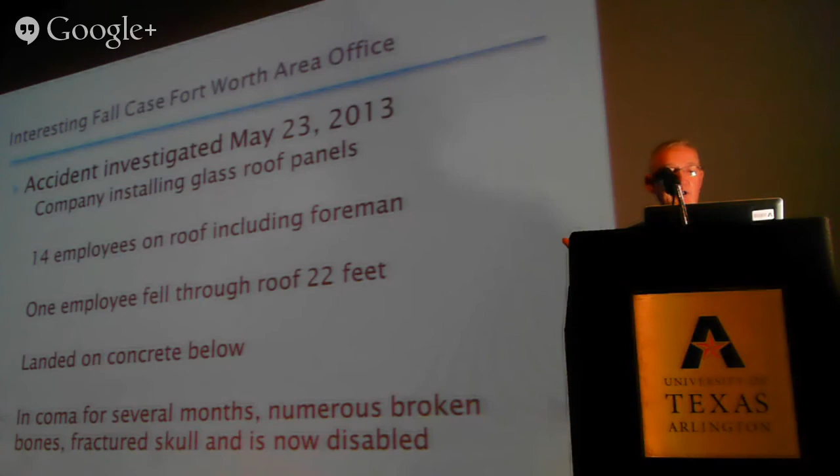There were 14 employees up on the roof, including the foreman. One employee fell 22 feet and landed on the concrete below. He was in a coma for several months, with numerous broken bones and a fractured skull, and is now disabled.

The company had a program in place which was 100% fall protection while they were in the installation area. What had happened was they had plywood over the holes where they were installing the glass.

One employee had walked outside that area, so he unhooked when he walked outside and went to go do whatever he was going to do. After he left that area, nobody else knew how to put the plywood back down to where it was actually secure enough for anybody to walk around out there. So what did they do?

Inspection findings found that after the employee had walked out away from the area, he was called back by the foreman. Since the warning line they had up there was only about 3 feet off the ground, all it was, you just had to step over or step back. There was nothing actually going to stop them from walking in there or notify them that they had to tie back off. So this employee, after he walked out, started walking back in. He just stepped over the area to walk right back in there, and he forgot to tie off.

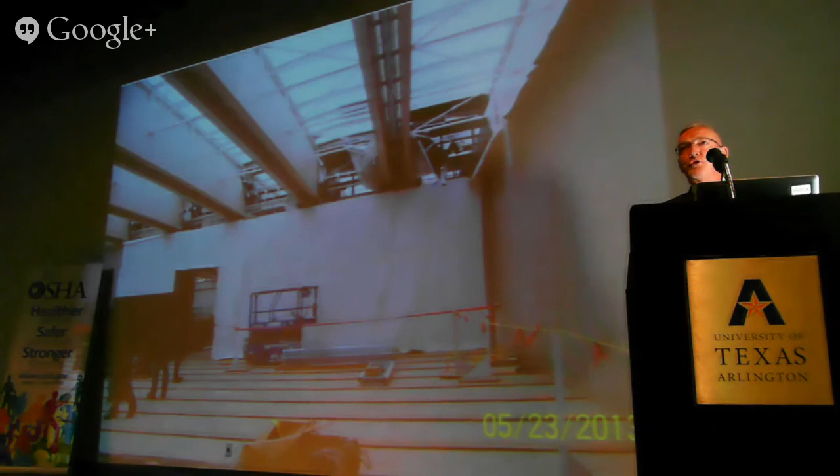You can see right here, this is where the employee fell. He fell through the glass and fell onto the concrete below. Again, luckily, he just had some cuts and bruises, or actually, he went into a coma. He survived the fall, but he's right now in rehabilitation. So what you have right there is the third case scenario, which is the worst of the best.

Our next one we're going to talk about is the ones from El Paso. You can see here that the inspections took place from May 14, 2010 to May 8, 2011, so we had about a 1-year period there. We had 3 of these falls that took place.

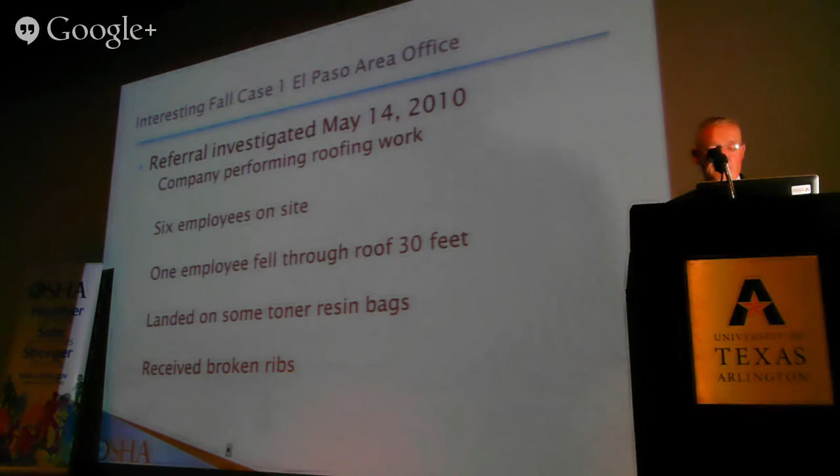The first one was a referral investigated May 14, 2010, where the company was performing roofing work with 6 employees on site. 1 employee fell through the roof 30 feet and landed on some toner resin bags, receiving broken ribs. This right here is probably your second best scenario, which is he just fell and broke some bones, but he's actually able to move around and do whatever he needed to do.

The inspection findings showed the roof deck was rotted through in several places. What had happened was the company didn't inspect the roof for structural integrity, no fall protection was being used, and they did not cover up the skylights. The citations issued in this case were a 501A2, for requisite strength and structural integrity of the roof; 501B4I, for fall protection for holes; and 503A1, for training.

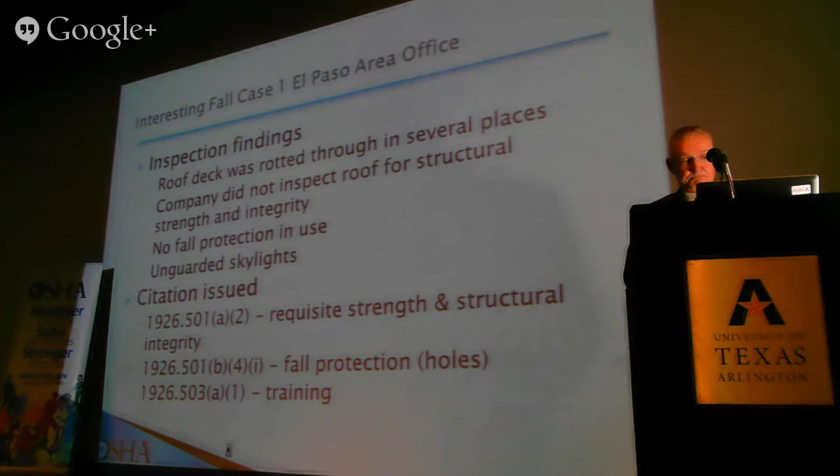You can see here where he actually fell right through the roof, and you can kind of see up here on the top where he had fallen through, and you can see where it was kind of rotted. That's what the hole looked like up on the top. Basically what you had was it was rotting out up there, rusting, and they didn't realize it. They could have walked up underneath this and looked to make sure the roof was actually going to support their weight up there.

Our second case involved a fatality investigation from August 25th, 2010. Company performing roofing work — this is your worst case scenario, by actually times 2 in this case. 2 employees were on site, a father and a stepdaughter, working up on the roof. The stepdaughter fell through a hole 25 to 30 feet and landed on the concrete below.

Needless to say, she did not survive. So in this situation, how is it that you, as her stepfather, now have to go tell that mother that her daughter has passed away on the job site?

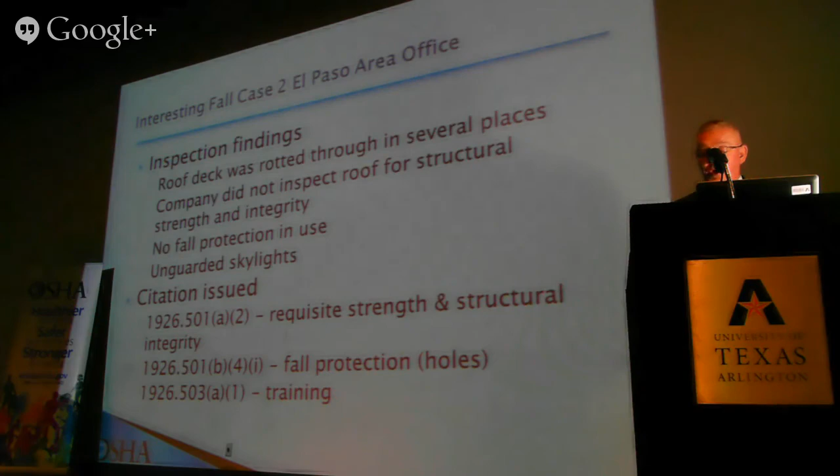Inspection findings: the roof deck was rotted through in several places. The company did not inspect the roof for structural integrity. Fall protection was not in use, and there were unguarded skylights. Citations of 501A2 requisite strength and structural integrity of the roof, fall protection for the holes, and then the training. You can see here where she actually fell through. And that's what the roof looked like on this one.

Our final one is actually a referral investigation. It was May 4th, 2011. A company was performing roofing work and repair on a school. And this is actually your best case scenario right here. The employees were on site. The employee fell through the roof 14 feet onto a table in the teacher's lounge, because they were working at the school, and all he suffered was some minor injuries. But again, we had where they fell through the roof.

Inspection findings were almost exactly the same. Roof deck rotted through in several places. The company did not inspect for structural integrity of the roof. Fall protection was not in use. 501A2, requisite strength and structural integrity of the roof, was issued, 501B10 for fall protection, and 503A1 for the training. And you can kind of see off those last three right there that they were actually all the same.

And so we didn't know if we were actually running into a trend out there, if this was just going to be something that we were going to find a lot more of. So that's why we went ahead and issued the press release to let everybody know, hey, you need to go up underneath there and actually inspect those roofs before you get up there.

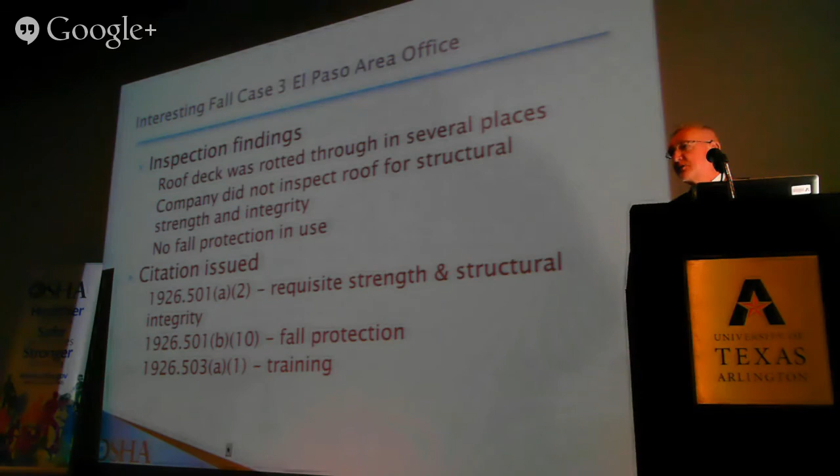You can see here, this is actually the teacher's lounge where he was. There was a table over there in the corner. This is actually taken up through that false ceiling, where you can actually see up into the top. And you can see the rest of the roof here is what it looked like up underneath there. The rest of it's starting to rust out also.

With that, do I have any questions? Anybody? Jack? Yes, sir. Did your people, when you were on top of the roof, was there any visible damage on the top of the roof? Because it looked like the roofs had insulation and things that would obscure you being able to actually see the roof members themselves. And my employees did not actually get up on the roof, because again, we're not going to go up there because we don't know what the condition of the roof is.

The only thing I can show you on these is that from below, any of them had that opportunity to go look. If whoever was inspecting the job site was going out and bidding the job, they could have walked in when they were looking around, and they could have probably actually seen that.

Any other questions? Well, again, I want everybody to make sure, if you're out there working in the construction industry and you're exposed to a fall, you need to make sure you protect yourself. Appreciate it. Thank you.

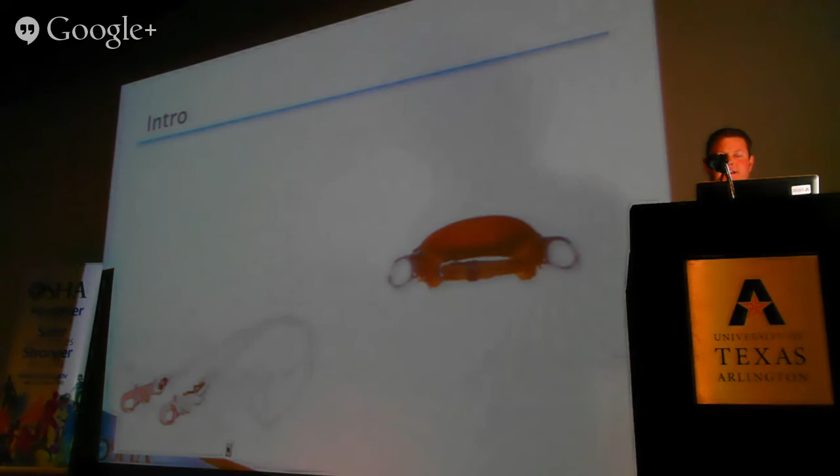So, we're also going to talk about eliminating risk. We have a big campaign right now to try to remove the risk from the employees, and there are several ways you can do that. We've got some slides to talk about it: reducing risk, fall rescue training, fall protection opportunities, and opportunities for improvement and making a difference.

So we have prevention, and with prevention you also have engineering and administrative controls. Prevention is like guardrails, warning lines, controlled access systems. Protection would be PPE controls, things like fall arrest and safety nets. I don't know if anyone has used safety nets yet to arrest falls, but we do use them as a preventative measure for dropping material. I'm not saying they're not used, but that's kind of the last resort, in my opinion.

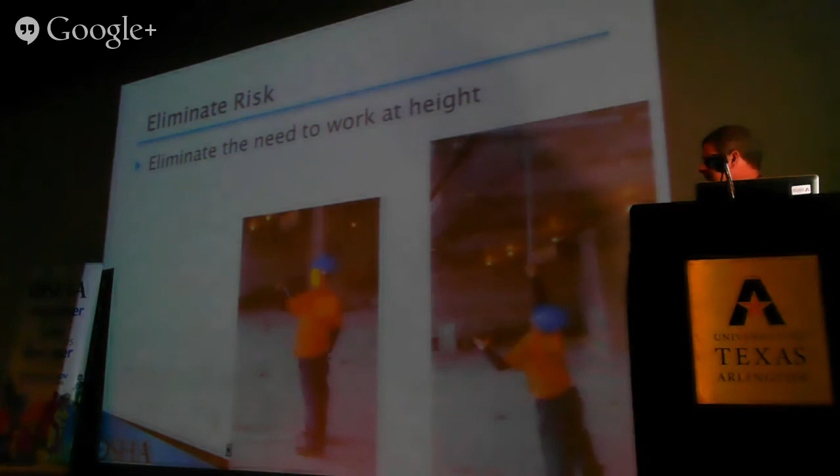So here's something: we've come up with a solution for pinning the ductwork to attach the insulation. The gentleman has come up with a piece of PVC pipe, and he's able to stick his pins on there this way, which eliminates the need for a ladder. Tools that reduce the risk, like a giraffe here. This allows an individual to stand on the working floor and raise the grinder up to the ceiling without ever having to get on a ladder or a scaffold. So we've reduced risk by allowing the guy to stay on the ground and avoid working at height.

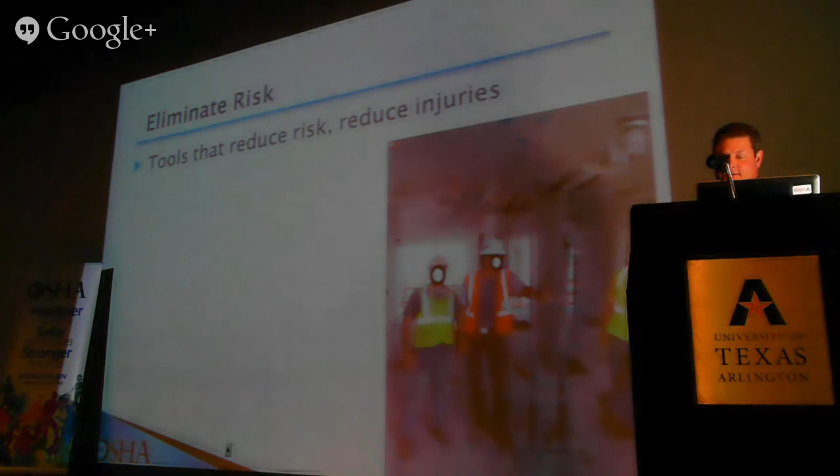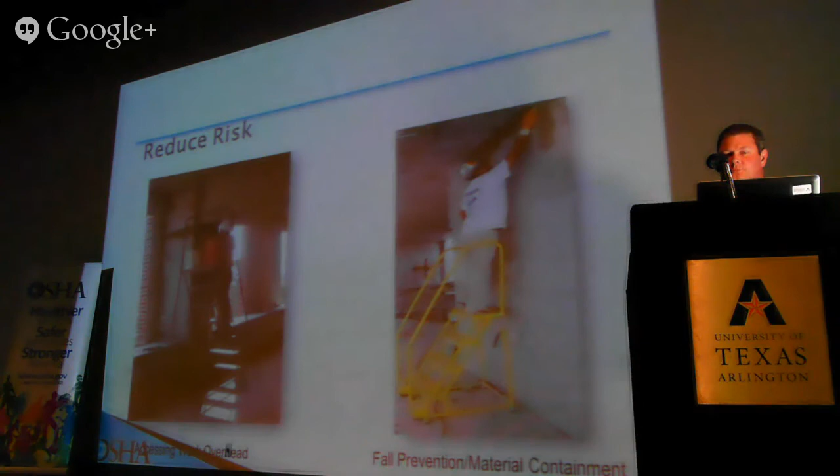Some opportunities here are platform ladders. Platform ladders come with handrails, and they also come with a platform to stand on. It gives a person more security when working. This might be another opportunity to reduce the risk of falls when we're working at height.

When we do have people working at height, if an individual has fallen, we have to save them. A worker that has fallen is probably unconscious or severely injured, not able to help rescue himself. So we've got to respond within minutes. Just a few minutes makes a big difference in saving an individual.

So what we did on the project, and this is kind of unique, we filled a 5-gallon bucket full of concrete, put an eye bolt in it, and attached it to one of the fall protection straps that were cast in place. We threw it off the side inside the elevator shaft, and we had the workers retrieve the bucket. The reason is that you've only got a few minutes to save a person suspended by their fall protection before they suffer injuries like blood pooling and other related things.

There are some opportunities. We built perimeter protection into the soil retention system. This is what Jack was talking about, pre-planning; this speaks specifically to that. It's an opportunity for all of us to look at our projects and think about how we're going to control the hazards on the job site and keep our employees safe.

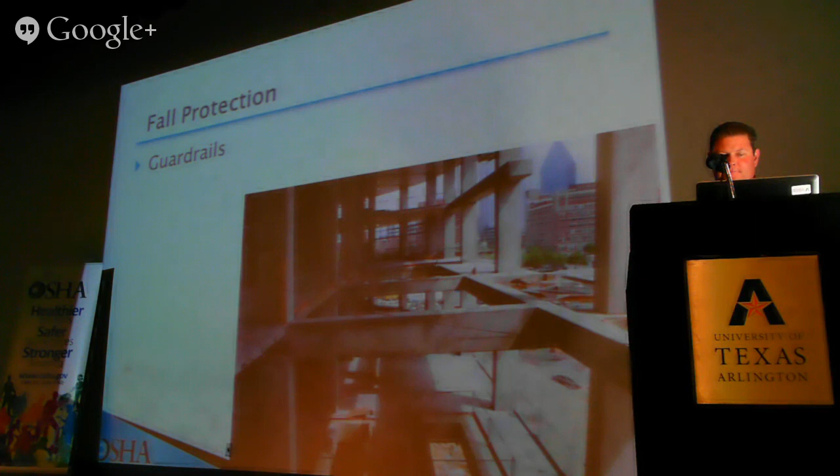All right, this next slide, we've got cantilever debris netting, and the debris netting is very crucial for us when we're building projects. The potential to drop something on somebody around the building is very, very high. So in today's day and age, with the speed at which we have to build, we really have to incorporate a lot of systems into the build of the job.

So in this, we pre-planned cantilever debris netting around the perimeter. You'll see it's missing right here and here. That's due to the landing platform for material storage or the material for the forming operation leaving, and then you'll see it stops here because we're about to raise the elevator up a little bit. So it has some limitations.

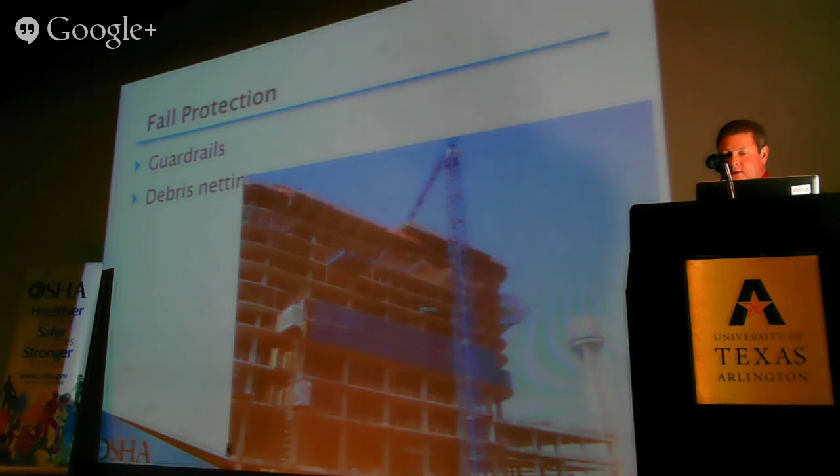To help with that, we also asked our forming contractor on the guardrail system that's on the formwork to put debris netting up and around there. This is for falling material for sure, but it also gives you another sense of security when you're up on those elevated decks looking 200, 300 feet down, and what safety measures are in place. It makes you feel a lot better.

Now, there are some opportunities where we still use the wood guardrail systems, and sometimes you have to use signage to let people know what the actual hazard is. So right here you see the confined space. It's a great place to stick your signage, but also if you build the guardrails, I want to emphasize how we build them. It needs to look professional. If it looks professional, it will have the effect that we want. I've seen guardrails built before that look like if you leaned on them, they'd fall down. That's not the intent. It is to save people, keep people inside the building footprint, and eliminate the fall hazard.

Here we have the metal guardrail panels, and this is probably one of the scariest places for me on the job site. The reason I say that is because in the elevator shaft area, we have a lot of work. What we still have going on up top is the construction of the building. So we have formwork up top, and then we have these open shafts from every floor, all the way from the basement to the forming area. And because the speed of the build is much faster than it used to be, we have to have people in the elevator shafts working at times.

So what we have done, as you can see in the photo, is we have cantilevered out platforms in there that provide a level of protection for material drop. We've also sectioned off the primary area for entry by wood guardrails, and also with the metal panels here. That's given us several levels of protection. Inevitably, you find people that want to get into the elevator shaft area. For me, that's scary, because if a guy drops, he could drop 300, 400 feet pretty easily. 6 feet, 7 feet, 10 feet would be too much for me.

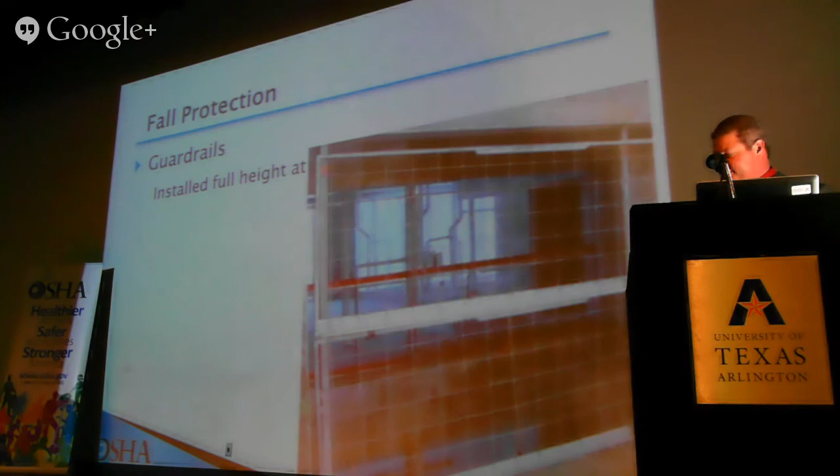You'll see that on our hoists, we fully wall the area around the hoist, and we limit the amount of space between the door and the car. The reason is that somebody could potentially get in between the car door and the door leading into the building, and we wouldn't want someone just standing in there, because if you allow enough space, somebody could potentially stand there when the car is passing. So we've eliminated that.

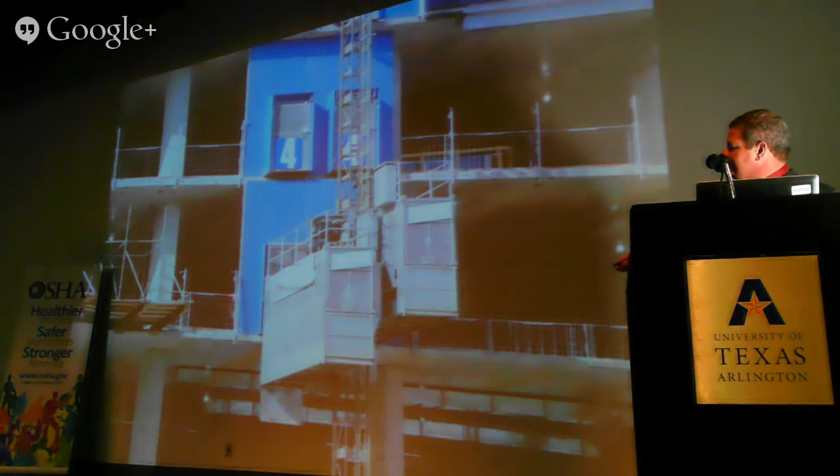Another thing is you'll see the metal guardrail panels sitting up to the sides, and then we've got a landing platform right here, and we use those panels to provide protection for that as well.

When we were talking earlier about pre-planning, this is an understatement. Planning for safety in construction, because we build so fast these days, is so crucial that if you don't plan for it until it's time to do that activity or perform that scope, you're going to be behind. So what you've got to do up front, before you ever get started, is look at all the hazards that exist within the building and come up with a plan.

These guardrail systems that are on this building right now probably took a carpenter crew at least a week to build, just in this one area. So looking at the time and trying to get people up to the elevated area safely, you've got to plan that stuff into your day.

Now I want to share a story. This is just a hole cover, and we talked about hole covers earlier. In 2006, I was on a job, and we had a guy who was new to construction. He was about 9 days in the United States, and probably 6 or 7 days on the job. I didn't even know the guy existed. At that point in time, we didn't have a new worker or at-risk worker program.

So what happened with this individual was we had some hole covers on the second floor of this building. Fortunately for him, underneath that building on the first floor, the owners didn't know what they wanted to put in this retail area, so all you had underneath it was compacted dirt, with a grade beam running around the perimeter. His foreman told him to pick up all the plywood on the project. This guy is making, I don't know how much an hour, but he feels like he's making good money for his family, and he doesn't want to let anybody down. So he goes to pick up the plywood, and he gets to this other piece that has 'hole' written on top of it. It's cleated so it doesn't get misplaced or displaced, and he picks it up, walks forward, and falls 19.5 feet down to the dirt below.

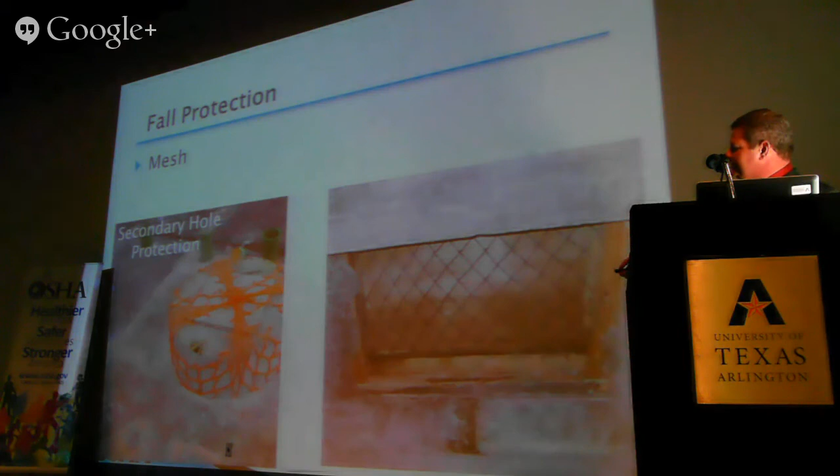This is another system that looks similar, but this object right here, we're going to see this appear right here. This is what it looked like whenever they placed the sleeve, they placed the concrete, and then they ripped out the sleeve. They had this mesh inside the hole to prevent somebody from falling. That's another opportunity. I still like the hole cover on top of it, but that's good planning.

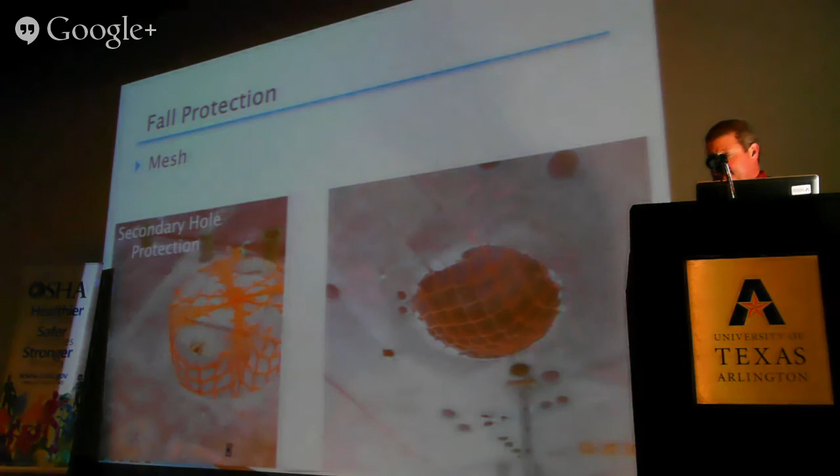And again, if you don't plan, you're going to fall behind quickly in this business because of the speed at which we have to build.

Vertical netting is something that we've used several times and we're going to continue to use because it provides so many benefits, like catching falling debris. We can do our work inside the building whenever we've got the mesh up. You can see we can use it on multiple floors, and we can continue to do our business inside the building and provide protection for employees from falling out and also debris falling out and hitting somebody below.

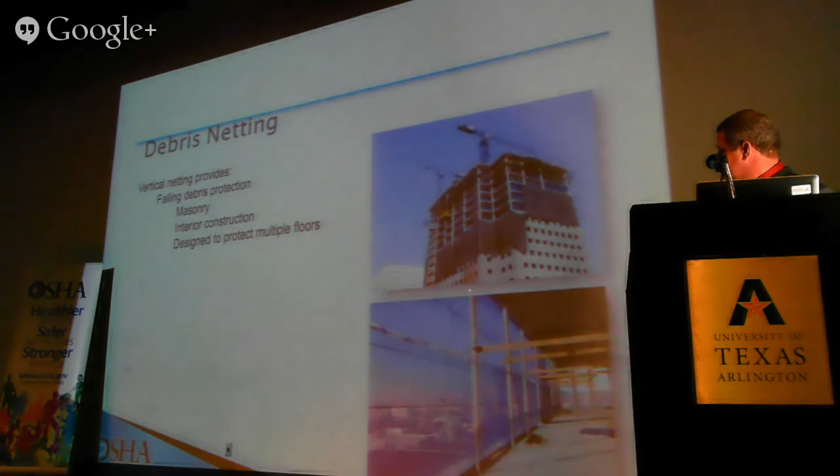See the shoring? This is something that's not an employee from falling, but it's definitely an object falling. What I'm looking at here is the shoring. It's been tied back to eliminate the event that if it comes undone from the structure, it wouldn't fall outside the building and hit someone.

Here's an opportunity where we've got the mesh in place, but we've also got a cast-in-place strap to tie off to. That again is a lot of pre-planning and a lot of opportunities for somebody to work safely up there, because typically when a guy goes up, he doesn't have a hammer drill to drill a hole and something else to put an anchor in, and he has to do that every place he has to work. So try and step out there and get in front and try to eliminate the barriers from working safe.

This is also another opportunity to get mesh underneath the formwork. I call this stick framing. What happens is you've got to put your aluminum beams out, and then you've got gaps in the formwork where a guy could potentially fall, or a piece of equipment or some material could fall. So they put nets underneath it. That's forward thinking, knowing that gravity exists and affects everything we touch, including us. We have to eliminate the potential for something falling.

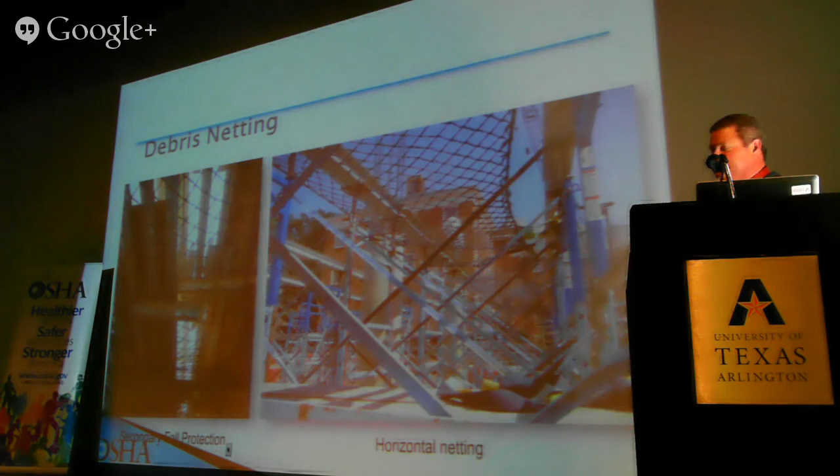Fall protection is as simple as ABC. A is an anchorage point, rated at 5,000 pounds. B is a body harness. What I said earlier is I wore a body belt when I started in the business. Now you have a full body harness. It almost looks like something you'd use if you were parachuting.

Here's something I want to challenge all of us on, and I keep hearing this from some people: they don't know how they're going to tie off at the base, at the ceiling, when their lanyard's 6 feet long and they're 5 feet or so to their D-ring, on a 13-foot floor, working on their ladder and tied off. They ask, how am I going to not hit the floor? Well, my response is, why don't we start trying to use self-retracting lifelines that stop our fall descent in 2 feet?

Here's a system that's out there on the market today, an opportunity to tie people off to. You see they've set it up in place. They've got this arm cantilevered out, and they've got their self-retracting lifelines tied to it. You can grab the hook, put it to your D-ring, step across into the fall zone, and you're protected.

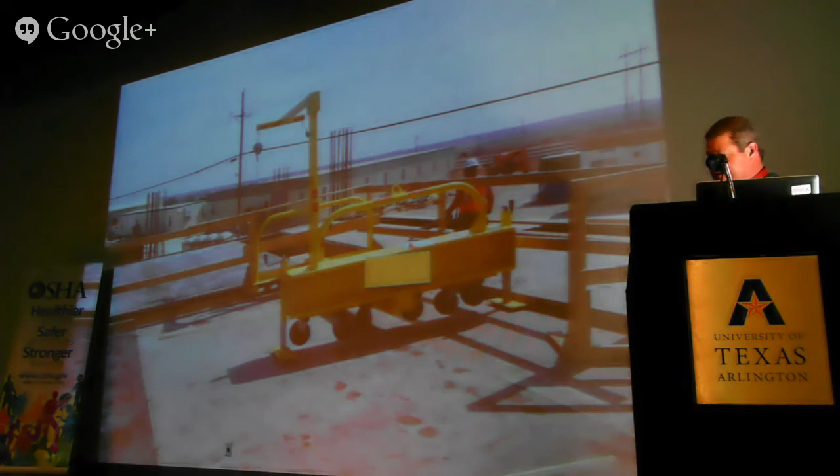Here's another system where they've taken a horizontal lifeline and wrapped it around the rebar coming out from the termination of the column, and tied it off to the other end, another column.

Vertical lifelines used to access work platforms is a very good way. There's a lot of good planning involved. They've got to climb that. In the event that they fall off the scaffolding, they could potentially save themselves just by being tied off to the rig.

Cast-in-place concrete straps, we're using those a lot these days, and potentially more so here in the future. Here again is somebody looking out in front. They've got their system placed into the columns, and then fastened on the end. They've got horizontal systems where they can build their formwork. They've got a lot of good fall protection practices out there that I've seen, and your contractor's pretty smart when you challenge them with a problem. Sometimes they come up with a really good solution, and a lot of these forming contractors have good plans.

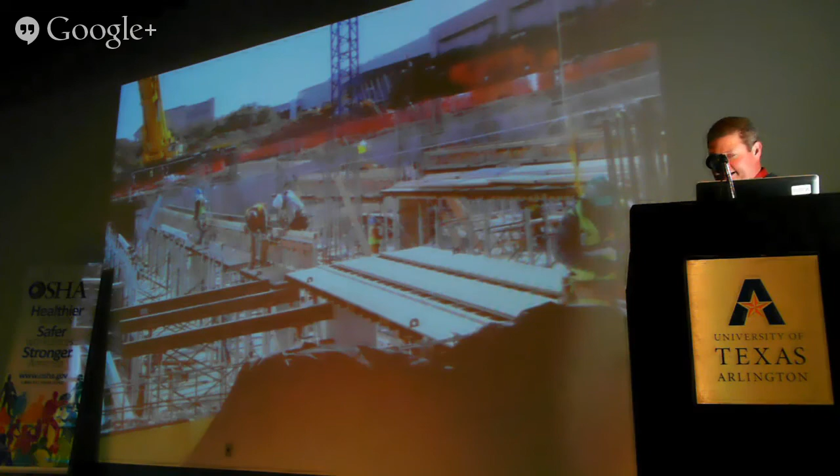The opportunities within the business—let's pan to this picture right here, and I want you to look at it. These guys have an engineered system. The concrete straps have been put in place. They're tied off, and they believe they're doing the right thing.

The problem with this is that the system's not made to have a knot in the rope, and it's not made to have sag like that. We have a contractor that bought them the equipment, but we really didn't teach them the right way to use it. That's what I see a lot, and the opportunity for us is to see those individuals and call that out. We have to facilitate change, and in that we have to be proactive in engaging in conversation. Sometimes it's uncomfortable, but we have to push people into considering what we're doing today may not necessarily be as good as what it once was when we started doing it.

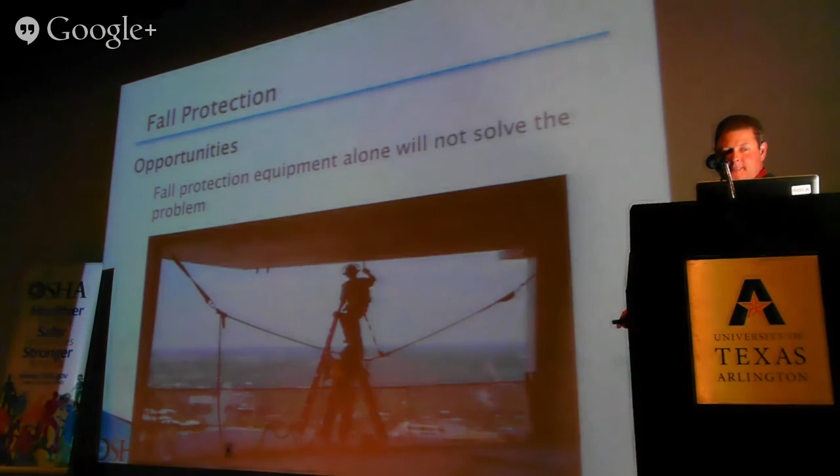As an industry, we must identify our hazards associated with our scope, and that means each contractor has a specific scope of work they have to do. Now in that, I think we all have to identify our hazards. We have to understand what we're putting our folks up into, understand the level of risk, because everything has risk—there are varying levels. Train our workforce accordingly.

And this one right here is something I'm not seeing a lot. There's a lot of good contractors that do train their people, and they do train to fluency, but there's some that don't. They just give them a one-time training, give them the equipment, and then expect them to do the right thing. That's a fallacy, and we've got to correct that if we're ever going to get past some of these things.

The next thing, and this is the one thing that's typically skipped, is verifying that training is effective. Again, we train them once, we give them the equipment, and then we turn them loose and we don't go check them.

We need to inspect what we expect. And that's huge for all of us. If you're managing people out in the workforce, if you don't tell people what you want them to do, show people what you want them to do, check up on them making sure that they're doing what you want, then at the end of the day you have no right to expect that they did what you wanted. If you've been in business or been a manager long enough, you'll know that to be true, because if you don't do those steps, every time you'll come at the end of the day and you won't get what you thought you had or wanted.

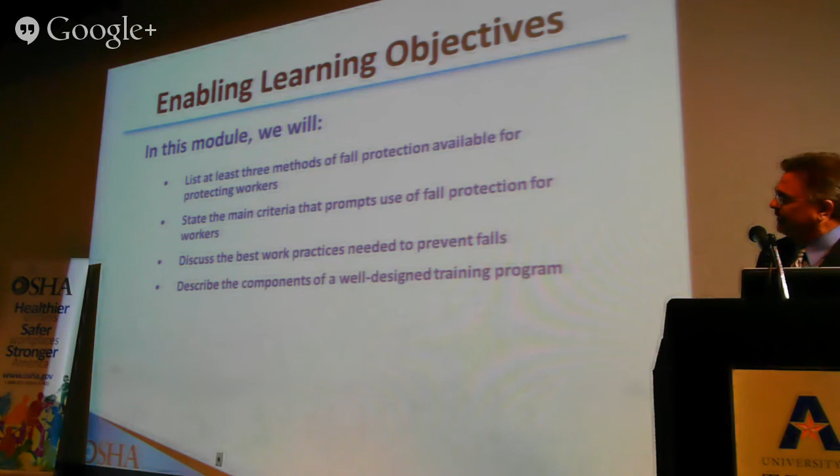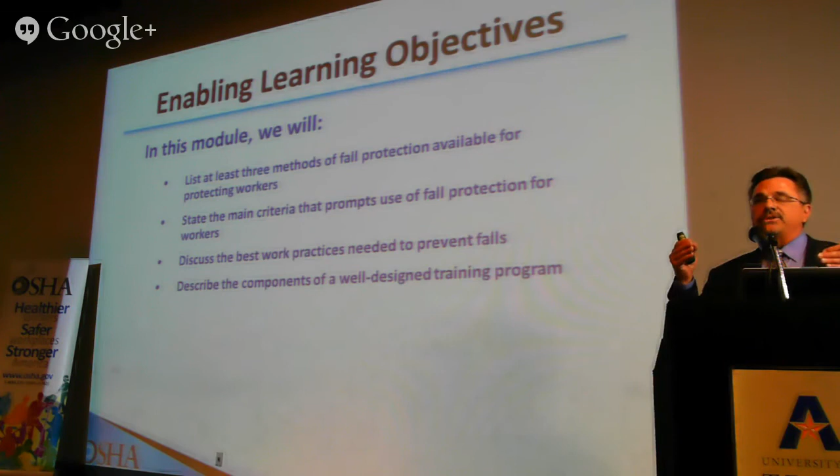So let's take a look. We will list at least 3 methods of fall protection available for protecting workers. We will state the main criteria that prompts use of fall protection for workers. We will discuss the best work practices needed to prevent falls, and we will describe the components of a well-designed training program. So 4 main enabling learning objectives that will get us ultimately to that terminal learning objective, that ultimate goal. All right, then what do we do?

We start to actually kind of flesh out those ELOs.

We start with just some basic facts to kind of get the ball rolling and get everybody's mind going in the same direction. So let's take a look at it. Falls are the leading causes of death in the construction industry. And what are we doing here today? And what are we doing here all week across this country during this stand down?

Ultimately, we're trying to save lives. We're holding training sessions, we've got lots of handouts and brochures and posters up, and everybody is talking about it, but what is the ultimate reason why we're even here? It's that first one. We're here to save lives, and if we can just save one life, it's been worth all of the effort, all today, all this week, all for the rest of our time to save that one life. That's the real reason why we're doing this.

Most fatalities occur when employees fall from open-sided floors and through floor openings. Falls from as little as 4 to 6 feet can cause serious lost time accidents and sometimes, yeah, even death. Open-sided floors and platforms of 6 feet or more in height must be guarded.

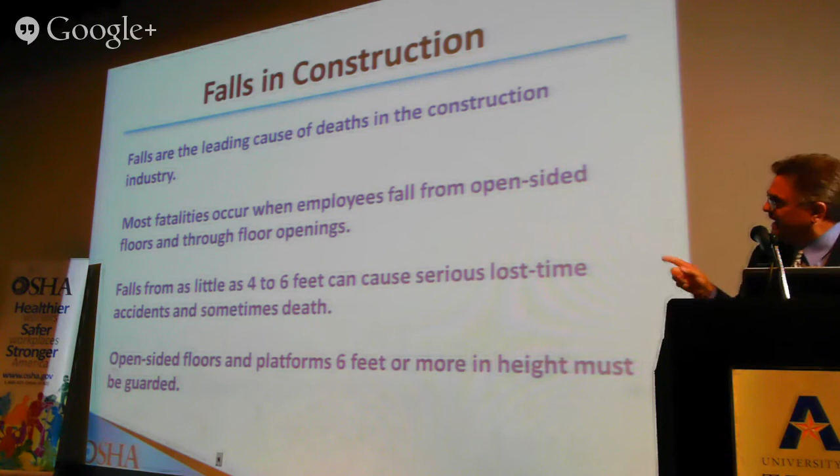Did anybody kind of do the math in their head that if he fell, he'd still hit the ground? And look at that bullet there. Falls from as little as 4 to 6 feet. Well, he was about 6 or 7 feet up a 10-foot step ladder. So he, wearing all this fall protection, thinking he was protected, could still have hit the ground. So even the small falls, the short falls, still can hurt. Off of this platform that I'm standing on, maybe off of something even shorter than that.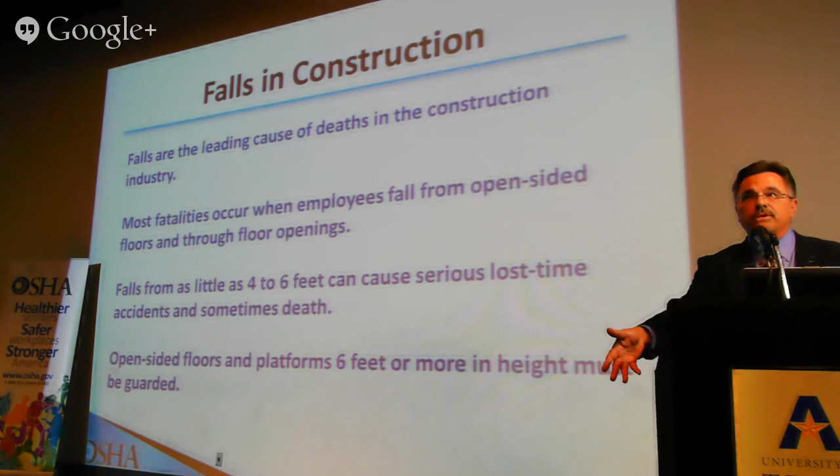Okay, let's take a look at our fall protection options. We have personal fall arrest system, guardrails, safety nets. These aren't the only options, but we call these the big three. One of these actually is an engineering control that would prevent the fall in the first place. That's the middle one, the guardrail system. The safety net on the right would prevent you from hitting the ground if installed properly, but the fall has already occurred. And when you hit a safety net after falling about 30 feet, that might hurt somewhat as well. Maybe even cause an injury or two.

On the left, we have the personal fall arrest system. Shane went over that very well with a full body harness, the lanyard, and an anchorage point. The ABCs of fall protection. But what has happened already? The fall has already occurred. And with a personal fall arrest system, now you have your worker hanging in the harness that just saved his life, and it could now actually kill him. Shane mentioned some of the problems with hanging in your harness too long. Orthostatic trauma is one of the big ones that we talk about in class.

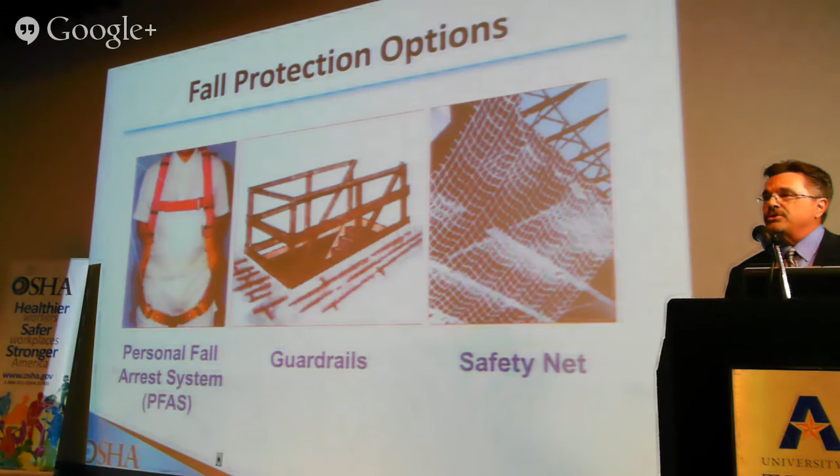So we need to get to those people fast. You have to have rescue teams available somewhere that you've identified in your planning process so that we can get those high-angle rescue teams to that person in a short amount of time and bring that person safely down. But again, it saved your life, and now what's happening is threatening your life as well. So of the three here, I think we would all agree, guardrail systems would be the method of choice because it truly does prevent the fall in the first place.

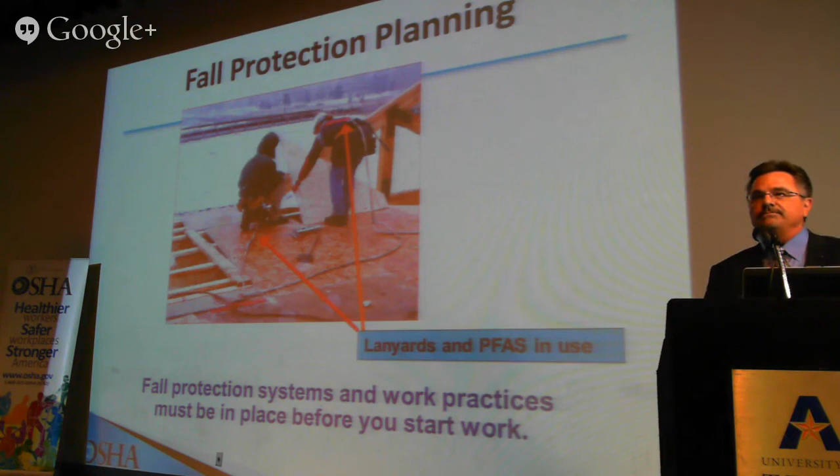Shane talked a lot about planning as well. There are two instances out there in the world that I think some of us have known, tried, want to try, maybe have played, and that's scuba diving and football. Okay, now we're in a big football state, so I'll leave that for a second. But scuba diving, that's practiced by quite a few people actually here in Texas. We have dive shops right here locally. One of the things that we say in scuba diving is this mantra we recite: plan your dive and dive your plan.

Scuba divers, both recreationally as well as commercially, exist in a very hostile environment. And when they're down there 120, 130 feet, yes, even recreational divers go that far, you're not just one breath from the surface, you're quite a bit farther than that. Surfacing when problems happen is not an option. That's another thing we say when we're scuba diving. Surfacing is not an option, you take care of it down below.

So we want to eliminate those hazards. We want to prevent those hazards. And how do we do it? With good planning. Okay, you see where I'm going here.

Football, big football state in Texas, and I'm sure that even there are some high school teams that could beat some of the college teams where I'm from. At least their stadiums could beat our old stadiums where I'm from.

But football is another great example. Would you ever go into a football game without a game plan? I mean, it goes with it, doesn't it? We've all heard it. What's your game plan? They research the opposing team. They find out where their weaknesses are, where their strengths are, and how we can actually do proper matchups against their people, against their defenses they'll throw against us, against their offenses, and come up with a good game plan in order to what? Play the game for 1 hour on a Friday night?

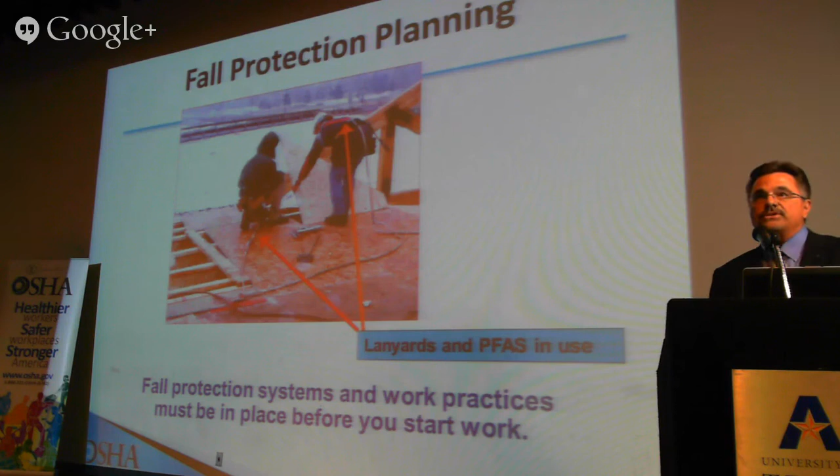So, planning is the most critical component of fall protection. With good planning, we will eliminate falls from happening. Fall protection systems and work practices must be in place before we start work. Now, there are some situations with scaffolding where scaffolding is being erected, fall protection systems may not be in place. Is there a safe way to erect scaffolding? Absolutely. I've seen it done. I've seen people erect scaffolding with absolutely no risk of falling at all.

Personal fall arrest systems, again, you must be trained to properly use PFAS. And of course, to review what Shane said before, what is a PFAS? It's your anchor point, it's your lifeline, and it's your full body harness.

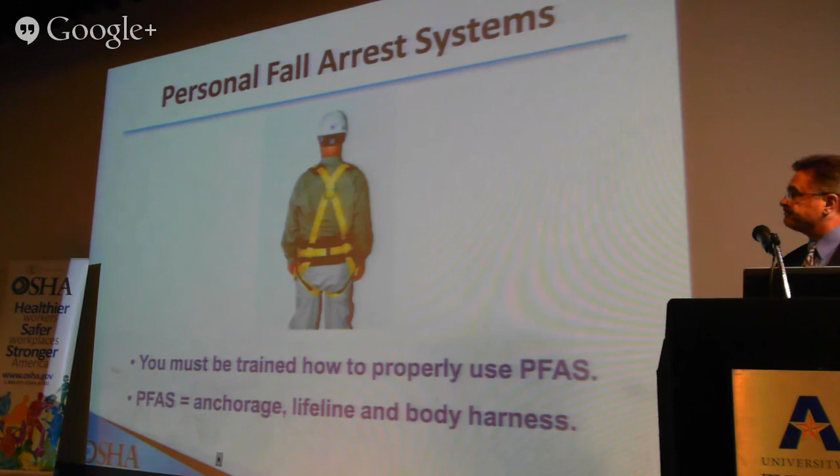Remember about your anchorages, 5,000 pounds, and that's per worker. Now, generally speaking, if we get single point anchorages and one person's on there, that's 5,000 pounds, that's not a problem. Where people start to go past that limit is when we have multiple workers on the same lifeline attached to the same anchor point. Remember that every anchor point, on each side, let's say, of a horizontal lifeline, has to be rated at 5,000 pounds per worker that may be on that line. So always remember, anchor points, 5,000 pounds per worker.

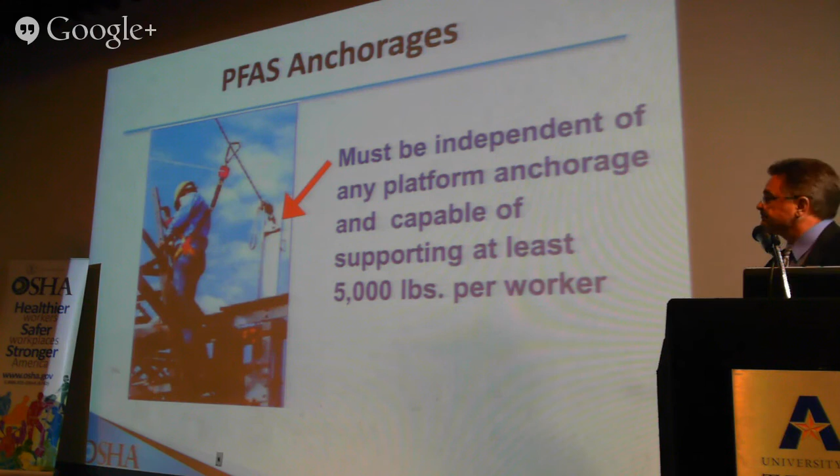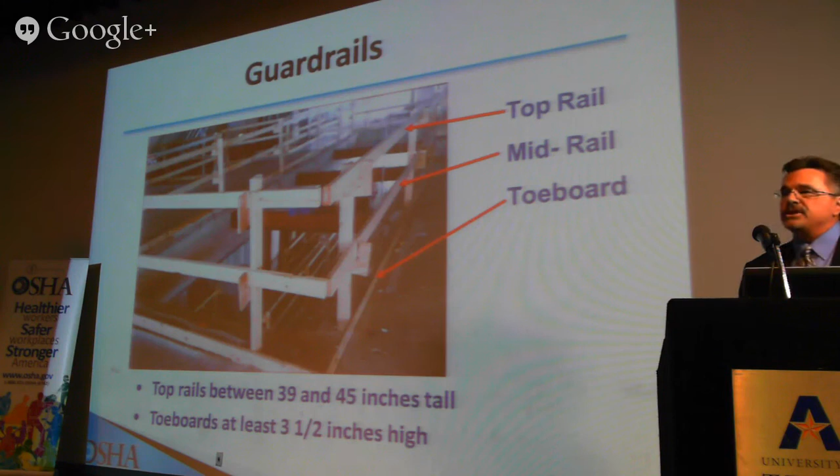Guardrails. We have top rail, we have mid rail, and sometimes if necessary, we even have toe board. Top rails are always going to be about 42 inches plus or minus 3, so 39 to 45 inches. Toe boards in all examples should be at least 3.5 inches high. But how strong should that top rail be? 200-pound force. How about the mid rail? 150-pound force. So will it support a forklift crashing through it? No. Will it support that worker who suddenly gets off balance and accidentally leans into it? It should.

Safety nets, again, will catch you from hitting the ground, but again, the fall has already happened. Place as close as possible, but no more than 30 feet below where employees work. In your regulations, if you look it up, there is a nice table that says, okay, how far out does it have to be from the edge of the point where the employee could fall? It depends on how far down the net is going to be. So check the table always. Make sure that you're actually positioning any safety nets according to that table. Distance out and distance down.

All right, so where's fall protection needed? A lot of people know, oh, well, they're on the roof, they need fall protection, but they forget about other stuff. Walkways and ramps, open-sided and edges, holes, concrete forms and rebar, excavations, roofs, wall openings, brick laying, and residential construction. All of these are cases.

Could you just basically say anytime you're working at height, you should be thinking fall protection? Okay, define working at height. Well, for me, it's anytime my feet are not on the solid ground. Anything else for me is working at height. Now, it may be that I'm only working 1 or 2 feet off the ground. I'm up on a small step ladder or some kind of a shelf next to a particular loading dock, something of that nature. Am I still thinking about the fall protection? Yes, I am. Because remember, even a small fall like that can result in a major injury.

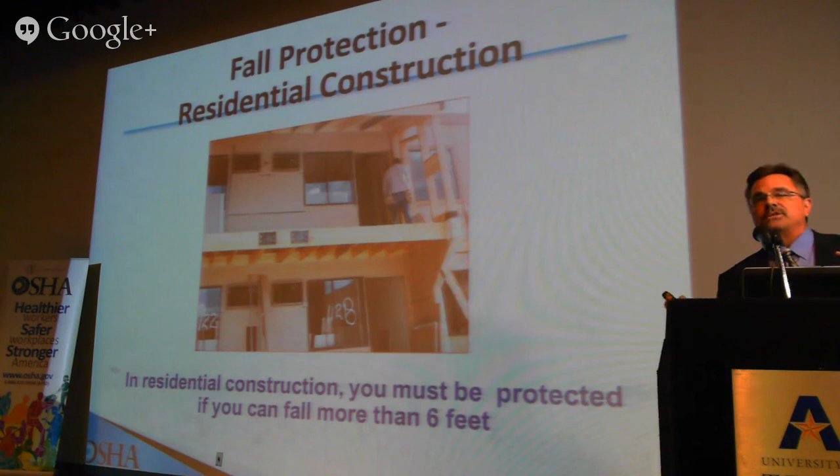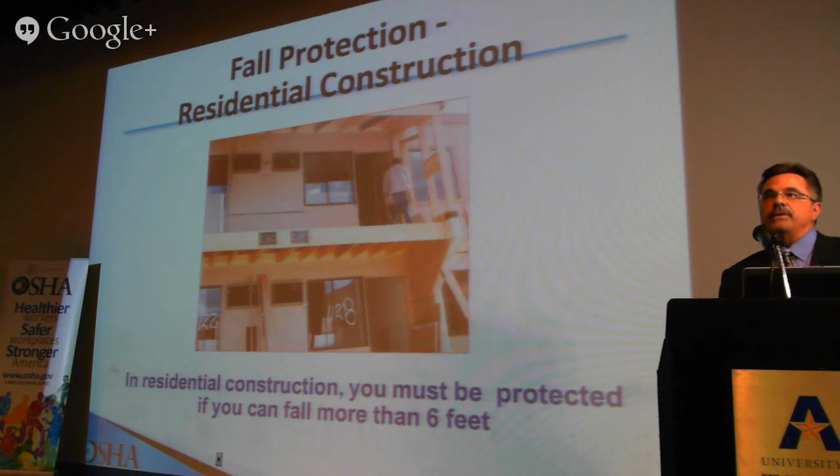Now, a lot of people say, oh, it takes too much time and effort and cost to put up these guardrail systems. No. If you've done any research lately, there are so many products on the market now for temporary guardrail systems that are easy to assemble, disassemble, and they're very good as far as the way they've been engineered to provide for safety.

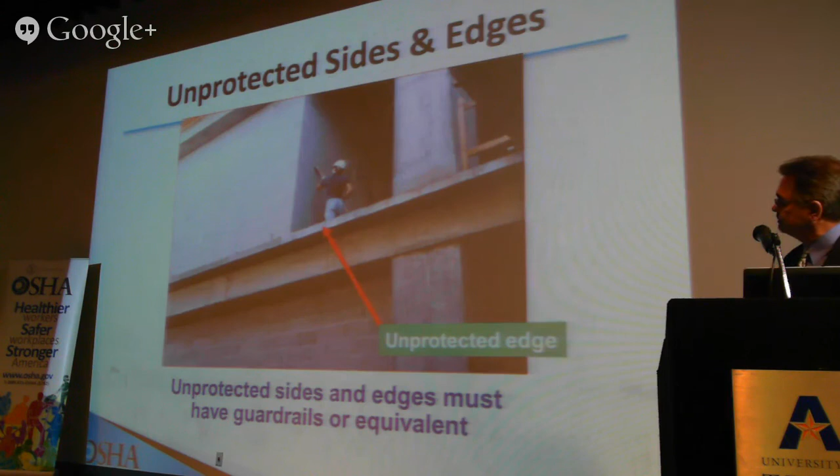Unprotected sides and edges must have guardrails or equivalent. Here's an improper guarding. That's a 1/4 inch nylon rope. Would you trust your life to a 1/4 inch nylon rope? I know I wouldn't.

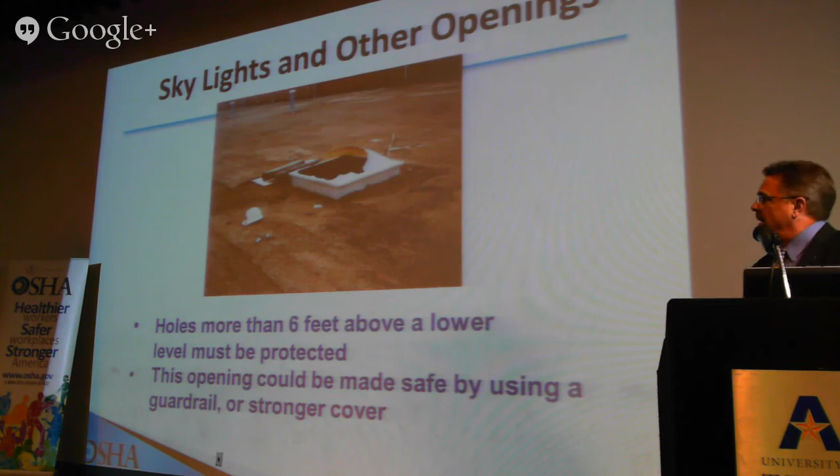And here's a skylight issue, and we've been talking a lot about that actually in the last couple of years. Holes more than 6 feet above a lower level must be protected. This opening could be made safe by using a guardrail around the skylight for when people are working up there. You can get a temporary guardrail system for that as well. And then also an option is the engineered protective covers that go over skylights that can withstand the impact of a human falling on top of it without actually falling through.

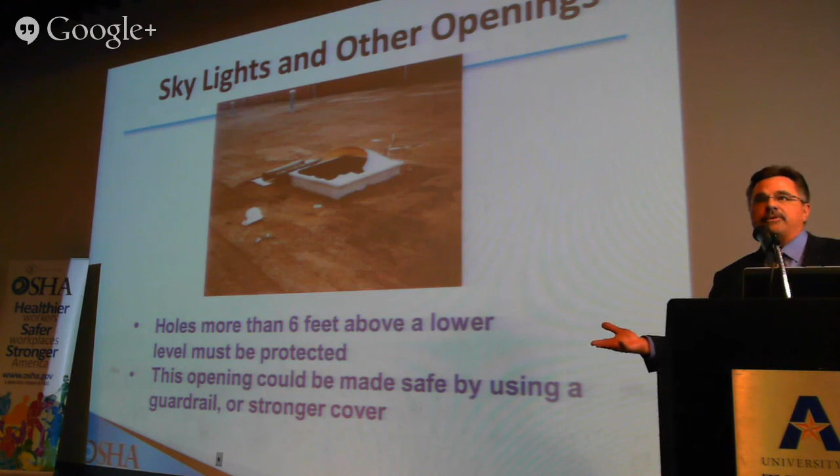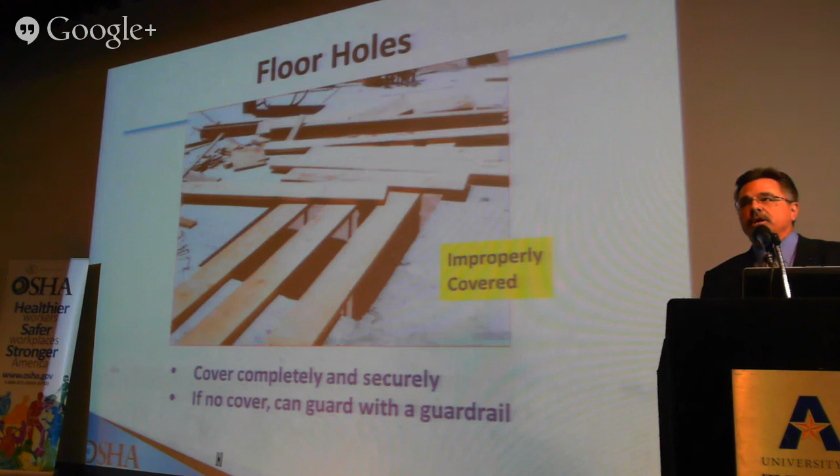Floor holes, this one is improperly covered. Remember to cover completely and securely, and if no cover, you can guard the area with a guardrail system. And remember about your covers on holes, does it have to be marked? Yes, it does. What does it have to be marked with? Words, either hole or cover. You got to let people know what's underneath that sheet of plywood that's been secured.

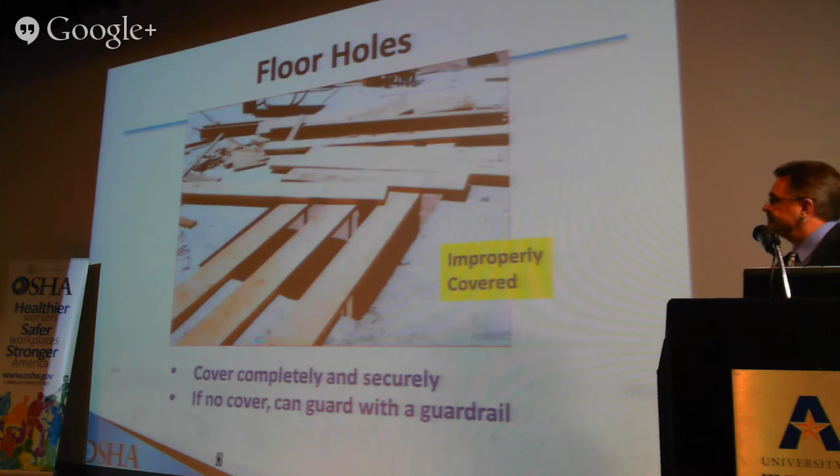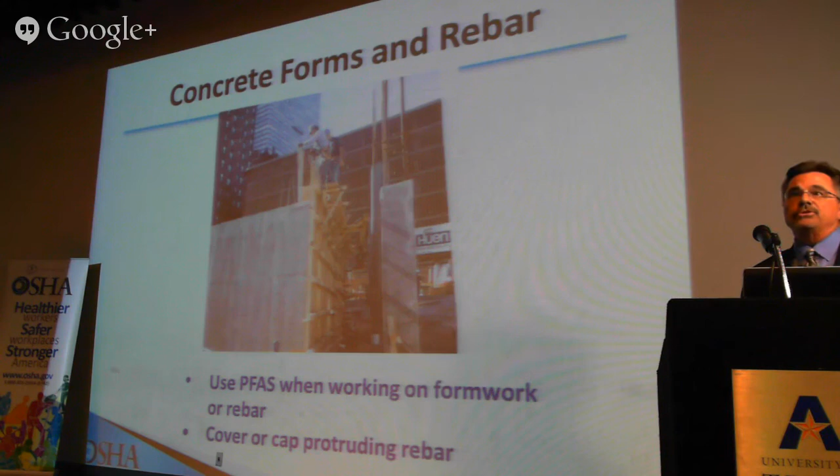Concrete forms and rebar. Use personal fall arrest system when working on formwork or rebar. Cover or cap protruding rebar. We also see when doing concrete and rebar kind of systems like this, people using what we call positioning systems. This includes your full body harness, but also short lanyards that prevent you from falling any more than 2 feet, keeps you in touch with the work that you're actually doing. It eliminates that longer fall on that longer 6-foot or more lanyard, and basically secures that worker to the face of wherever he is working on that rebar system.

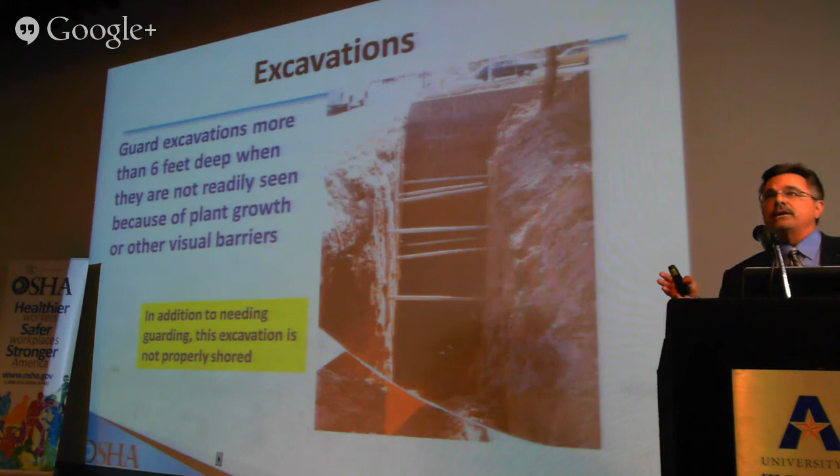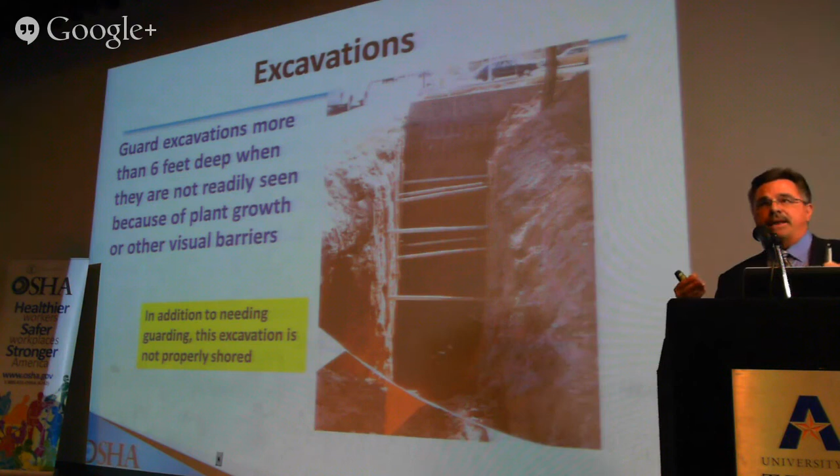Excavations, a lot of people focus on, of course, the excavation itself, the trench, the shoring, the shielding, whatever the case may be as far as protective systems inside the trench. But a lot of people don't actually do anything regarding the top of the trench from a fall protection standpoint. So one of the things that OSHA has written right into their regulations is that some measure to prevent people from falling into that trench must be taken if that trench is obscured by any kind of barrier from any kind of visual observation. So if you have buildings, other structures, shrubbery, something like that, that's actually obscuring that trench from someone who is walking up close to it, that whole trench system has to be guarded from falls.

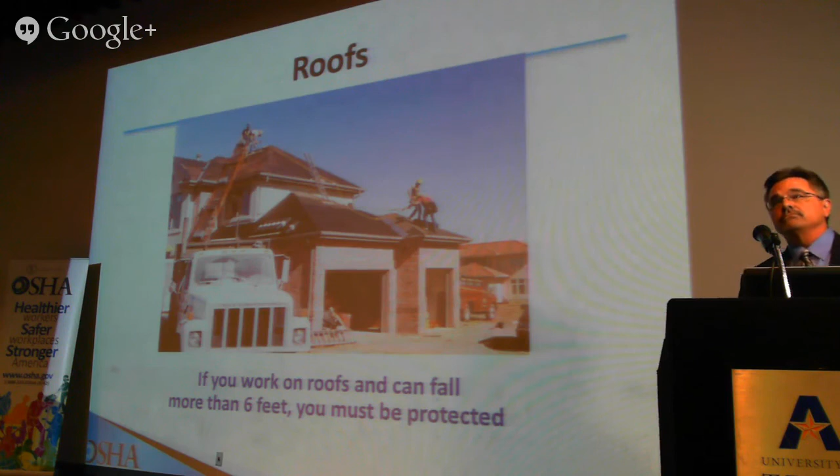And roofs are probably the thing that we see most often, especially in residential construction. And I'm sure that any of us driving around the Metroplex here in Texas could probably see this on residential construction, where we might have contractors up on roofs doing the roofing work, and at least to the naked eye, we don't see the fall protection that really should be there. If you work on roofs and can fall more than 6 feet, you must be protected.

Wall openings, a lot of times with higher rise construction—apartment buildings, dormitories on campuses, office buildings, that sort of thing—you will see these door and window openings in the sides of the walls. These have to be protected until those fixtures are actually installed. They must be protected as if it's an open side, which in fact it is.

Good work practices: perform work at ground level if possible. I remember in the old days, they used to actually construct a lot of the roof while up on the roof, whereas now they're putting all of that together on ground level and then craning that roof right up onto the plumb-and-lined existing structure. This eliminated a lot of that work that was being done at height, because all of that work's done on the ground and then just lifted into place.

Tether or restrain workers so they can't reach the edge. A lot of people call this a dog leash system—it's basically a restraint system. If I were to walk over near the edge of this stage with a proper restraint system on, attached to a point behind me somewhere and adjusted properly, I could never even reach the edge of that stage in order to fall off. That's what's called a restraint system.

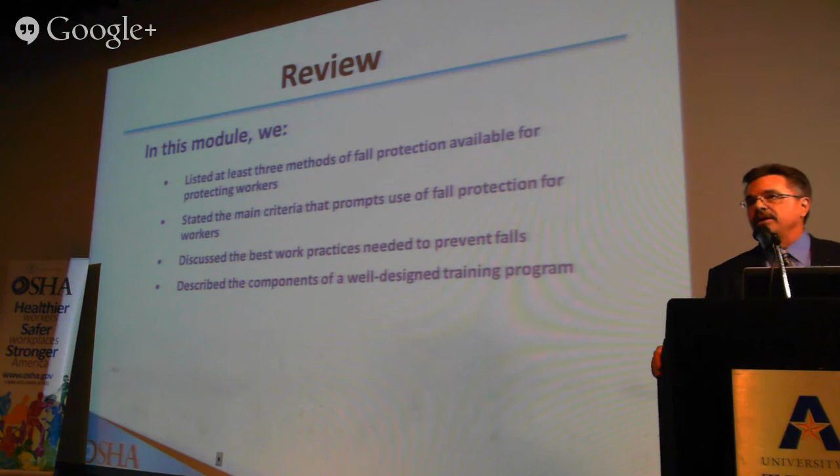That's what happens when we do something like this stand down this week. The word's going to get out, not only on the work site, but that'll transfer to stuff at home. So when you're hanging your Christmas lights this year, and you're suspending your body over the edge of the eave on your house, 15 feet off the ground, think about today. Get a big ladder, tie it off at the top, or hire somebody else that's a professional to do it better.

Any other questions? I think we really concentrate on our job hazard analysis, especially no matter what the subject is, but especially fall safety now with the stand down. There's our direction with our contracting services, and you've taught us that as well as OSHA rules. But I think we should take a better look at these job hazard analyses - don't just take them as written, make sure these guys are getting in a group together and having this discussion together, not separated and not listening to what's going on every morning.

That's a great comment, and for those of you at home or at work that didn't hear it, the comment was that we should be paying more attention to making the job hazard analysis we do on a job site one of the cornerstones of our overall planning, as well as our daily job safety briefings.

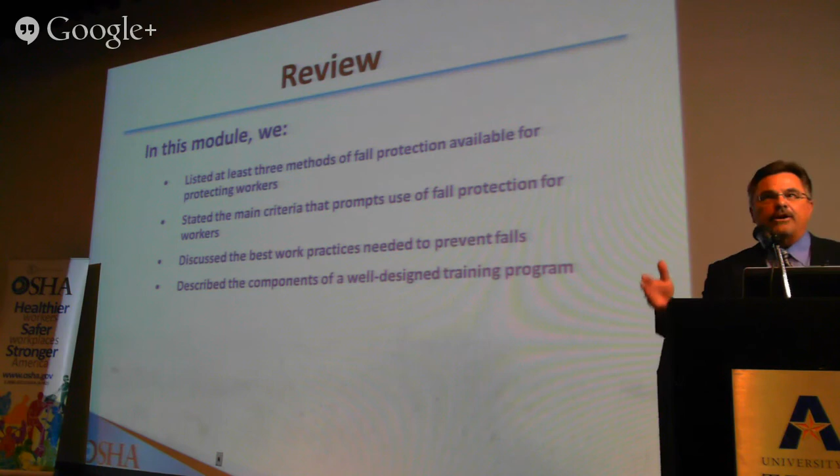Getting all the workers together to go through that JHA - there are different acronyms for this - but basically it's identifying and assessing the hazards on that job site, going top to bottom, every part where a hazard might exist, and then everybody on that job site gets together as a team on a daily job safety briefing to go through it. I think that's huge in keeping the level of awareness up on the job site daily.

Absolutely, it's such an important part of your planning process. Yeah, oh I'm sorry, I have a question - one I get into some regular debates over. When you're in a scissor lift, are you still required to wear a full fall arrest system?

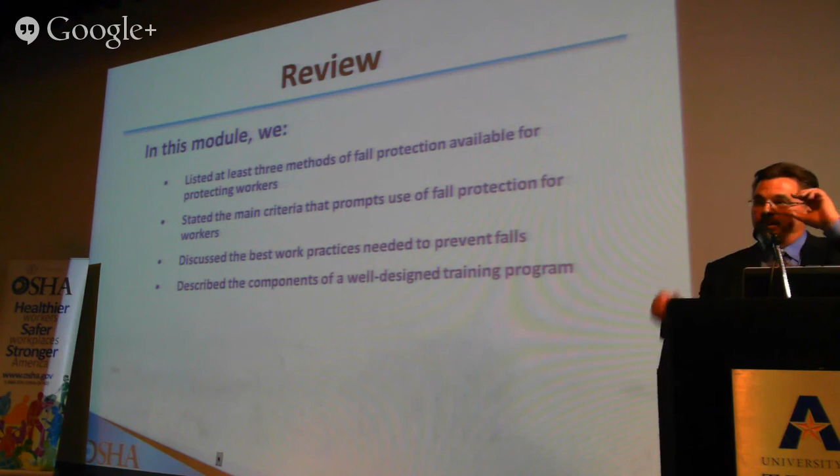Okay, the question was, if you are in a scissor lift - and I'll assume everybody knows what that is - do you have to have a personal fall arrest system in place, a full body harness and lanyard attached to the anchor point on that scissor lift? The answer is not according to OSHA regulations - you do not have to if that scissor lift is equipped with a proper guardrail system.

If it's not equipped with the proper guardrail system, including the actual gate that closes behind them, then you must be protected in one of the other ways, preferably the personal fall arrest system. As a matter of fact, I believe they call out that a full body harness and lanyard to an anchor point must be used. So it's all about that guardrail system.

Now that's OSHA, that's federal OSHA. Don't forget where you work, because I used to do a lot of training with the Army Corps of Engineers, and in their EM 385-1-1 Safety and Health Manual - which a lot of folks besides the Corps of Engineers have to follow on their job sites, along with the OSHA standard - they actually call for a personal fall arrest system even with a full guardrail system on the scissor lift. So don't ignore your local or organizational safety regulations.

Just because OSHA says this, you may be in a location - it might be a state with a state plan, it may be an organization like the Corps of Engineers, or even your own organization, maybe a construction company - that says anybody on our job site, including our subcontractors and vendors, has to follow these rules above and beyond what OSHA requires.

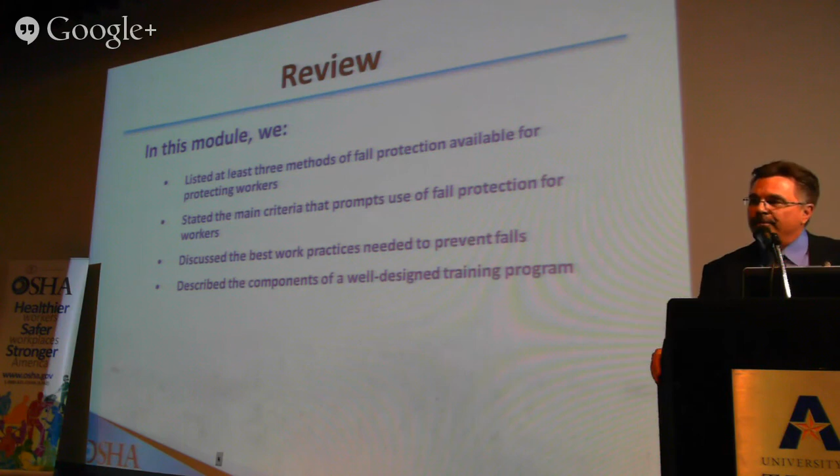Thank you, go ahead. Now the anchor points that are rated for 5,000 pounds per person - does that have to be installed by an engineer? Okay, if it's already a pre-engineered anchor point, then no, it doesn't have to be installed by an engineer - it can be installed by and supervised by your competent person. But if it's something you're fabricating from an idea you sketched out on a napkin, then a registered professional engineer is your best bet for certifying and evaluating that as a good anchor point.

Good questions, thank you. Any other questions?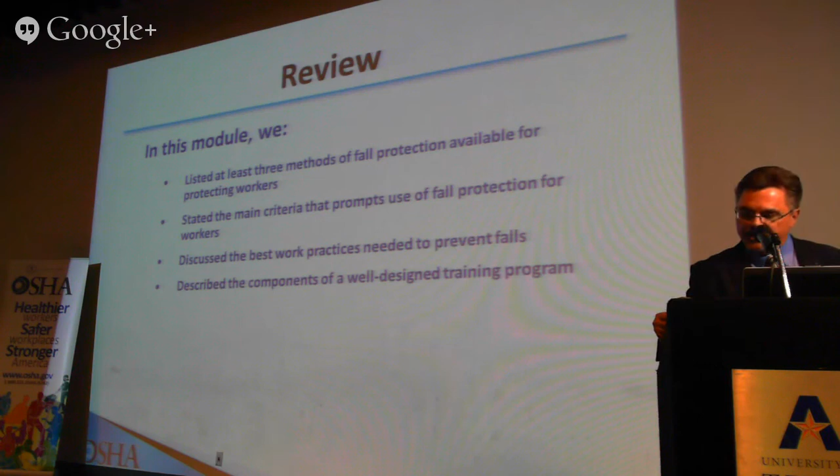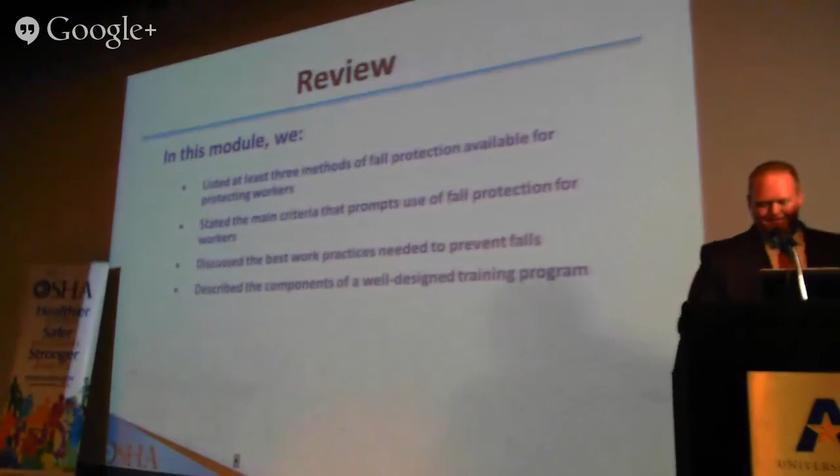Your stuff. I didn't do this, but you can get to do this.

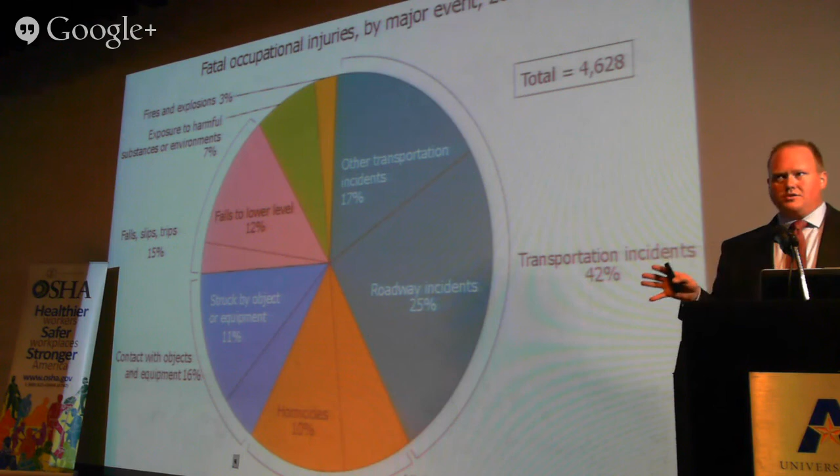Next, we're going to talk about the fatal occupational injuries by major event in 2012. As you can see, this is industry-wide, so it's not construction-specific. It's across all industries — manufacturing, general industry, oil and gas, construction — across all workplace injuries in 2012. And you can see falls, slips, and trips accounted for 15% of all the fatal injuries.

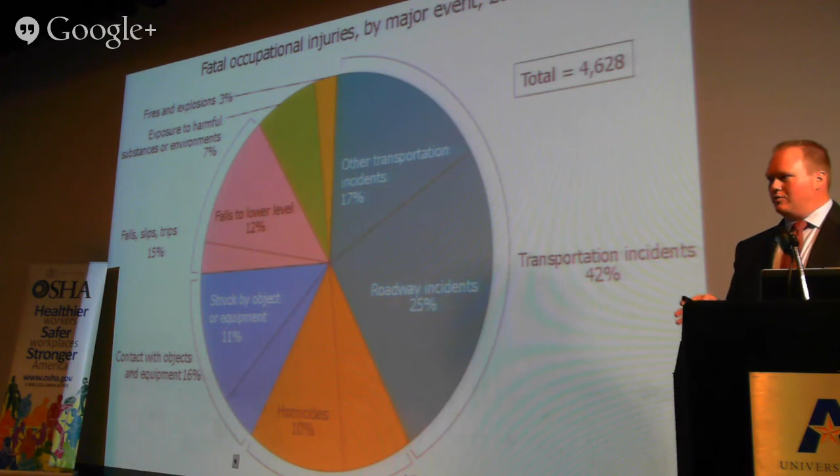Now, that may not seem like a lot, but when you break it down and take a look at the roughly 4,600 fatal events last year, 15% of those were related to falls. And I can tell you today, and it's not a secret to anyone, falls are the leading cause of death in the construction industry. We're all well aware of that, and that's what we're here today for: to take an effort to decrease that number.

It's very sombering. It goes back to some of the information that's been presented all day. Plan, provide, train. We want to make sure we plan the job, provide the right equipment, and train our employees. When you're training your employees, as Matt mentioned, they have to be proficient in the language that you're speaking to them. You have to make sure that they're understanding what you're teaching. You have to follow through with that. Make sure at the end of the day they understand the material that you are presenting.

Matt also mentioned fatal falls at the height of fatal falls. It's kind of ironic that we actually have this in here today, and he was talking about the stage. You at home can't see how high the stage is. I would guess it to be probably 4 feet. And a lot of times we talk about the distance of these fatal falls and how high do you have to be. And a lot of times you read about the stories of the 25, 35, 45 feet, people falling. But it can occur as little as 6 feet, less than 6 feet from the first rung of a step ladder. It can occur.

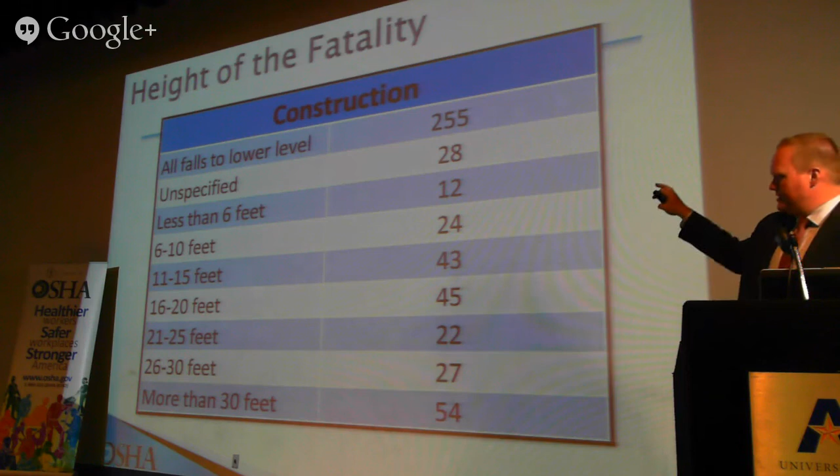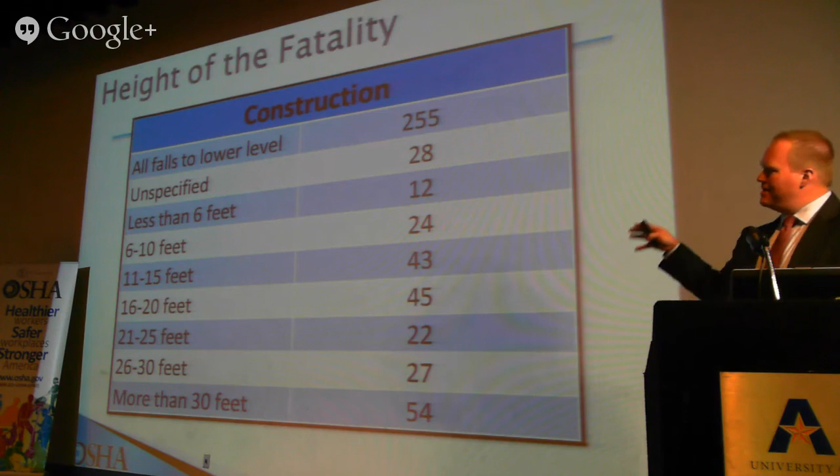And again, I hate presenting presentations a lot of times with numbers and with data because sometimes it doesn't mean a lot. But I want to emphasize that these are all individuals that didn't get to go home at the end of the day. And that fatality occurred in an avoidable accident. It could have been prevented. There's something that could have been done that would allow them to go home at the end of the day to their loved ones.

We're down to 3.6 now in 2012. So it has decreased significantly since 18 back in 1970, but our job is not done. At the end of the day, if one person doesn't get to go home, our job is not done. So we have made great strides.

I don't want to be the browbeater today and tell everyone they're not doing a good job, because we are doing a good job. We've got to do a better job, and then we've got to do a better job and a better job. So we are making strides. We are reducing the fatal injuries per 100,000 workers, but we have a ways to go, and we're going to get there. We're going to come up together. We're going to partner together. We're going to come up with new programs. We're going to come up with ways to make sure at the end of the day, workers get to go home.

Let's talk about the standards that we're citing. As you might imagine, the standards typically remain the same. Fall prevention, our 501(b)(1) series are the top cited standards, year in and year out typically. The others may jockey for position. Hazard communication is in a race with scaffolding and respiratory protection and electrical wiring and methods. In the construction industry, we can always guess the focus four: the falls, electrocution, caught-between, struck-by are the leading cause of death in the construction industry, but they also correlate closely with the standards that we cite.

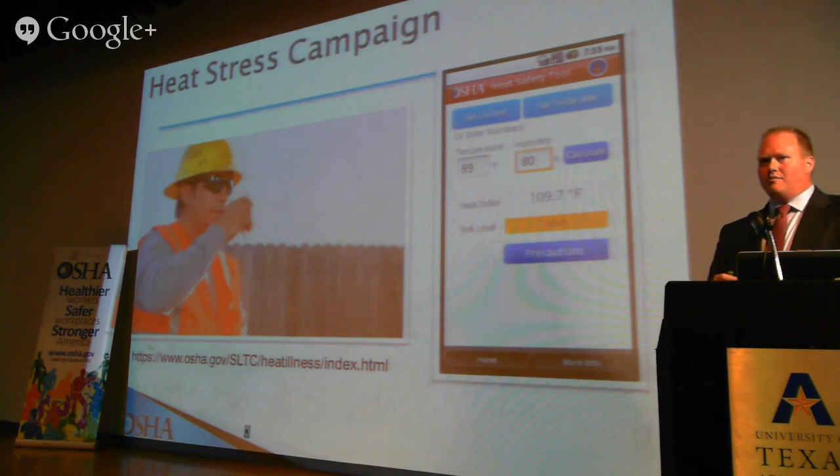We have to provide our workers with water. We have to provide them a place to rest in the shade. Water, rest, and shade. And still, each year, we experience fatalities across the country for injuries, for heat stress and heat stroke that can be easily prevented.

So here's some data. Drink water every 15 minutes. Make sure you provide your workers a cool, shaded place to rest during the breaks. Depending upon where you're at, wear a hat and light-colored clothing. There was a study done not too long ago about a company that switched their hard hats from a blue hard hat to a white hard hat. It decreased the overall body core temperature to like 7 degrees.

So take that into consideration as you're planning your job sites, as you make that next big purchase on hard hats or company apparel, whatever it may be. Make sure you instruct your workers to look out for one another.

Instructing them on what signs they need to look out for in their coworkers, some of the signs and symptoms of heat illness, and make sure they know what to do in the case of an emergency. One of the most important things that sometimes we forget.

At the end, I want to wrap up and talk to everyone about some of the popular programs that we do have in Region 6. Many of them you may or may not be aware of.

Our Voluntary Protection Program, we typically reserve that program for companies that have well-established, elite safety and health programs. They have the programs in place, they have injury and illness prevention programs already in place, and their workers are following it. We currently have about 2,400 participants in our VPP program across the country.

If you are interested, I encourage you to take a look at the OSHA webpage. All of these programs are explained in great detail. I'm not going to explain each one of them in great detail, but they are out there for you to take advantage of.

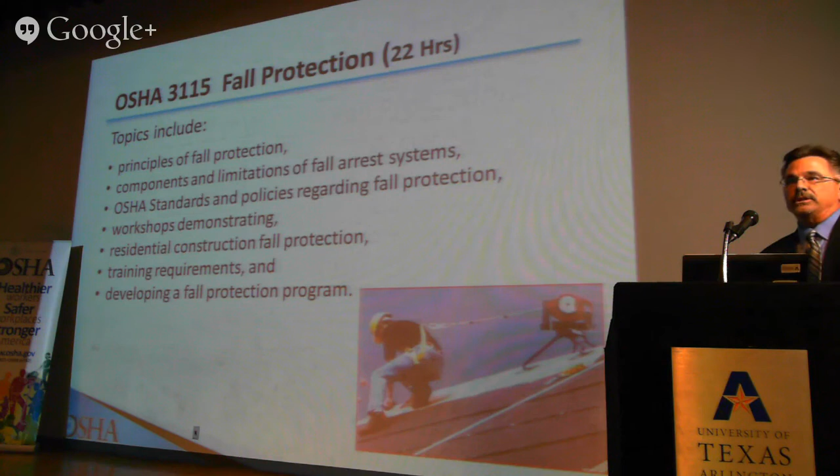So the next question I normally get is, what kind of courses do you do here? We do 3 specific ones. The OSHA 3115 Fall Protection course is 22 hours long, taking 3 days to present the material. Those are the kinds of topics we address, and it's a very standards-based course. The typical audience is someone who supervises other people, a safety professional, a leader in an organization, or owners of organizations.

We also have the OSHA 7405 Fall Hazard Awareness course for the construction industry. This is a 1-day seminar type, what OSHA calls a short course. The audience is top to bottom, all through an organization, all the way to boots on the ground. It covers identifying fall hazards, analyzing fall hazards, preventing fall hazards, and going over the OSHA resources that address them. It's a very overview type of awareness level seminar.

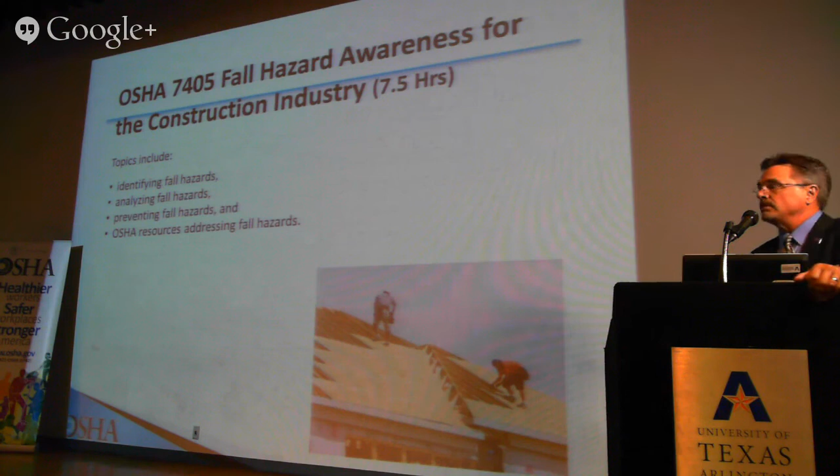Then we also have what's called the Public Works Training Institute within our division, and the PWTI 204 Fall Protection Awareness Course. It's 1 day, designed for the public sector employee. So anything out of our Public Works Training Institute includes roads, utilities, buildings and facilities management, things like that. Topics include identification of fall hazards, best practices, planning, and so on, but it's focused toward the public sector.

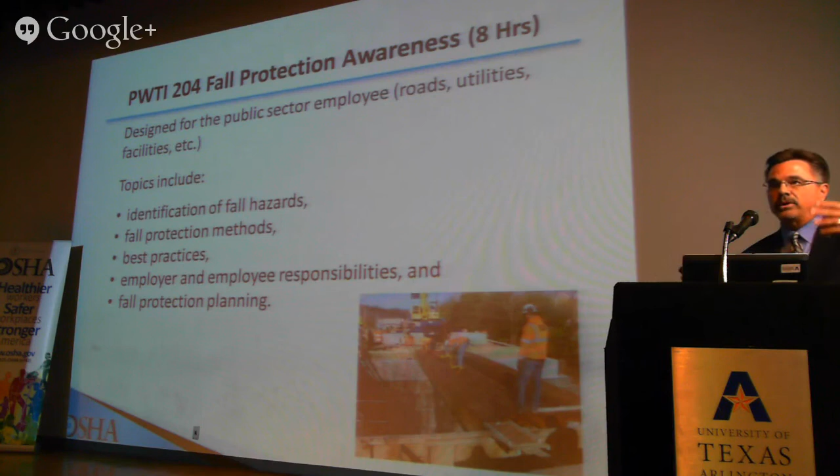I mentioned utilities, roads, facilities, and so on for public sector employees. It also focuses on contractors that work for the public sector, because they go hand in hand—you're working side by side with those people in the public sector, but you're a private contractor. This course is also designed for those contractors. So those are the 3 main courses we provide here at UTA.

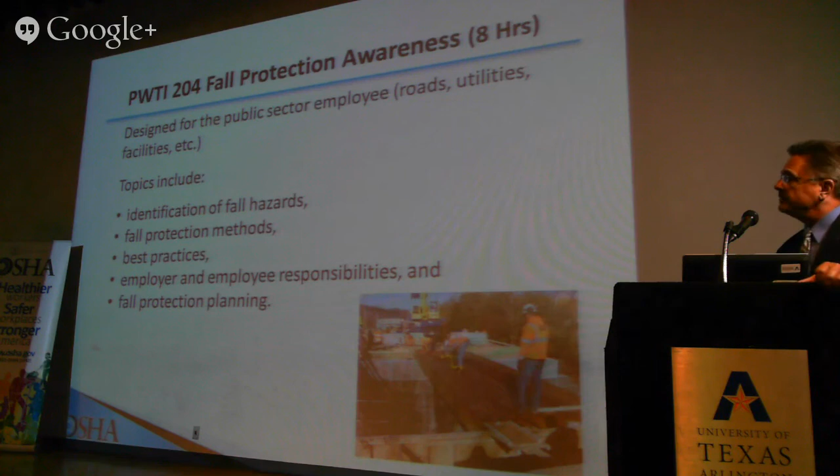And of course, I want you to contact us, so contact information is there. You can always just Google UTA, OSHA, something like that, and you're going to get to us. Okay, do you have any questions on any of the stuff I just presented?

Okay, so now what I want to do is invite Jack and Josh up on the stage, please. And Shane is back—you were hiding in the audience. Come on up.

Okay, this is our formal question and answer session. Can I do this? Oh, sweet. Or maybe not—oh, maybe I can't. I'm trying to mess with the equipment.

All right, we'll step up one at a time. Does anybody have any questions for any of the 4 of us as we are here? You guys want to come over here? Everybody go that way. Any questions? We are here at your disposal.

Ms. Ball asked: Is there a regional emphasis program on falls and construction for Region 6? The question was whether there's a regional emphasis program for fall protection and construction for Region 6. It's not specific to falls, it's specific to construction in Region 6, so falls is obviously a component of that emphasis program. We correlate it back to the main focus 4 hazards we identify—it's not the only 4 we have, but it is what we typically look at. We do focus on falls at construction sites, and we do have a regional emphasis program that incorporates those. It's not specific to falls, but it does incorporate falls.